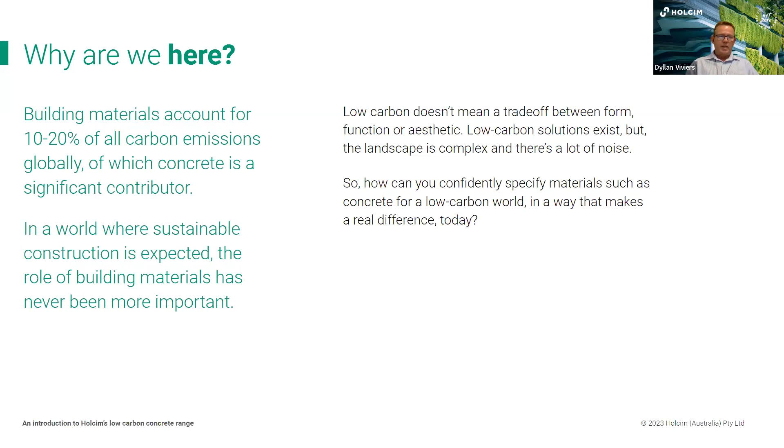It's all of us that have a role to play in that, right the way through the supply chain, from supplier to specifier to government, to the developer, the builder, the concrete placer. It's about having those conversations early in the piece, talking through the whole process and working with each part of the supply chain to ensure everyone's comfortable and aware of what to expect. It's about us all coming together and having those early conversations.

From Holcim's perspective, we launched EcoPact back in April 2021, a low carbon concrete achieving 30 to 60% reduction based on the reference case and verified by an EPD. It's been two years now since we launched EcoPact, and there's been a lot of work to work through and help with that education process.

Last year alone, I did 140, 150 odd presentations to all different stakeholders, from architects, engineers, sustainability consultants, developers, to actually being on site with the concreter while he's placing it. That's a key part of the whole journey, making sure we as suppliers are standing up and helping everyone through the supply chain understand that there are low carbon solutions out there.

You can start using them. And it doesn't mean a trade-off in performance or aesthetics.

The other mix that we launched, part of the EcoPact range, was EcoPact Zero, our carbon neutral concrete. Those two mixes are identical from a mix design perspective. Holcim has Climate Active certification, so what we do is really drive sustainability by reducing embodied carbon as much as we can, and then we offset the remaining embodied carbon.

Is offsetting going to be the way of the future? Definitely not, but it's a step in the right direction, and we just got to keep putting one step in front of the other.

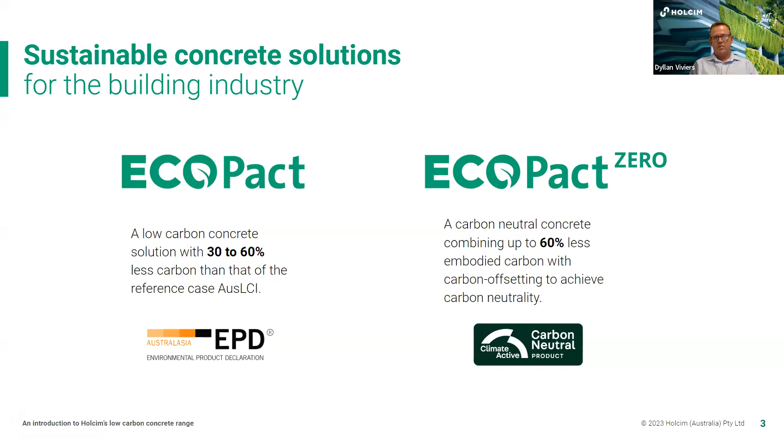Some of the key myths when it comes to concrete, we've been faced so many times having conversations with concreters on site who say, I used green concrete 10 years ago and I was here till midnight trying to finish it. But innovation and technology in the concrete game has come so far in the last 10 years. It's quite incredible.

All these points here: Holcim's EcoPact doesn't deliver longer curing time. We can do PT floors reaching 22 MPa in 3 days, pumpability to towers, self-compacting concrete, low carbon self-compacting concrete. EcoPact ticks every single one of these boxes, and those solutions are out there, but it's all about the education process, and we all should be taking a stand on that.

We should all be talking to suppliers, having those early conversations, talking to the actual contractor on site placing it, so that they're aware of it.

Last year, we did a bit of a roadshow with Surfers for Climate. What they do is pull together tradies who go surfing, spend the day surfing, and we did an actual roadshow with them talking about the sustainable concrete solutions that are out there now. It's quite amazing talking to the concreters as well as the specifiers, everyone has a different opinion.

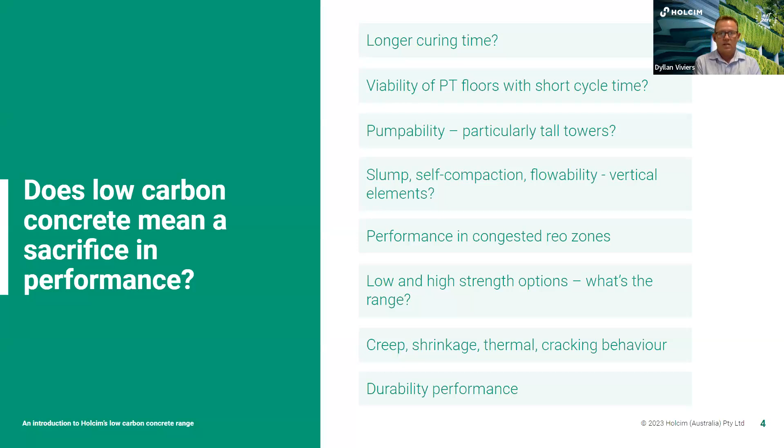We had technical representation on site, operational representation on site. The concreter was off that slab in the same amount of time as conventional concrete. Then on the structural side, the vertical columns, there's 40, 50, 65 and 80 MPa concrete in this project, all achieving a minimum 30% reduction with no problem and not affecting the timeline.

Same with the PT slabs, 22 MPa at 3 days. So there are solutions out there now, but you'll hear it time and time again from all of us: early engagement and early collaboration is definitely key to understanding what is available and how it can work. Then also doing trials and tests, so that we as a supplier can show contractors or concreters on site that it's okay, you can use low carbon concrete, you're not going to be there till midnight. It can be placed, pumped and finished like conventional concrete.

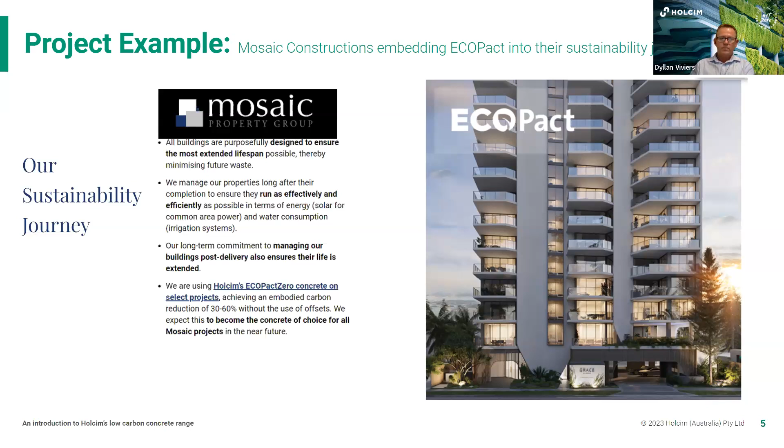It's all well and good to say low carbon concrete, this 25 MPa concrete, is reduced to 150 kilos of CO2 emissions per metre, but what does it actually equate to? Simply put, just one typical residential slab supplied with low carbon concrete achieving up to a 60% reduction equates to 8 cars off the road. We're also having those conversations with volume builders who do 2,000 houses a year. Can you imagine the difference they would make by converting over to low carbon concrete and the impact that could have on our environment?

That's been one of the challenges. The whole industry has gone through so many price uplifts and shortages on materials. Two years ago when we launched, that was a very difficult conversation with developers. Now developers and builders are starting to understand where we need to go. We've got to get to net zero ultimately by 2050. We need to start acting now. The conversations are a lot easier to have because there is interest and people are starting to understand more and more that low carbon materials can make a huge difference.

Some of the roadblocks are obviously price, and I saw that earlier on. You can get low carbon concrete for $5 on top of conventional concrete. It's out there now, you can use it and start factoring it in, but those conversations have to be had during the design phase.

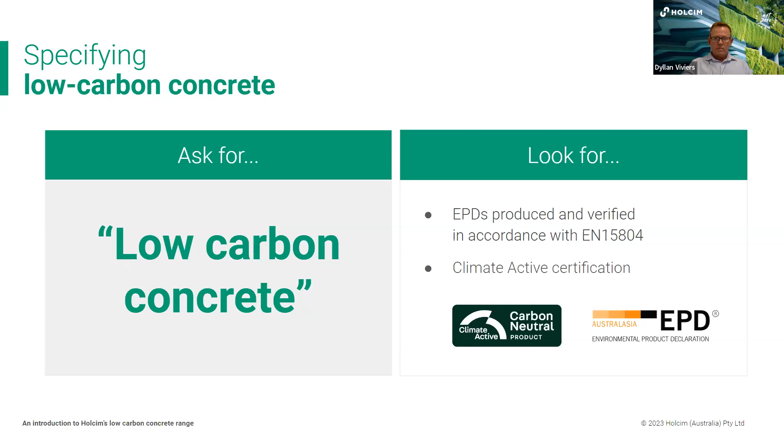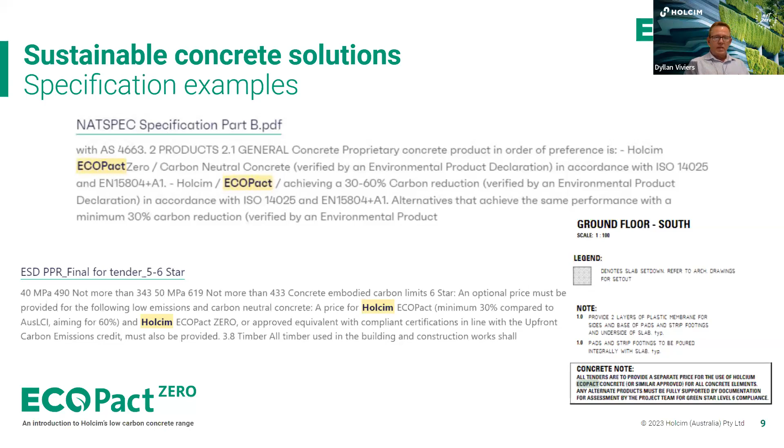Thank you, Dylan, that was terrific. Hearing the potential savings and the fact that you've got placing it, pumping it, and finishing it like conventional concrete is very, very encouraging. Look forward to unpacking a bit of that, drawing out some more in the panel discussion.

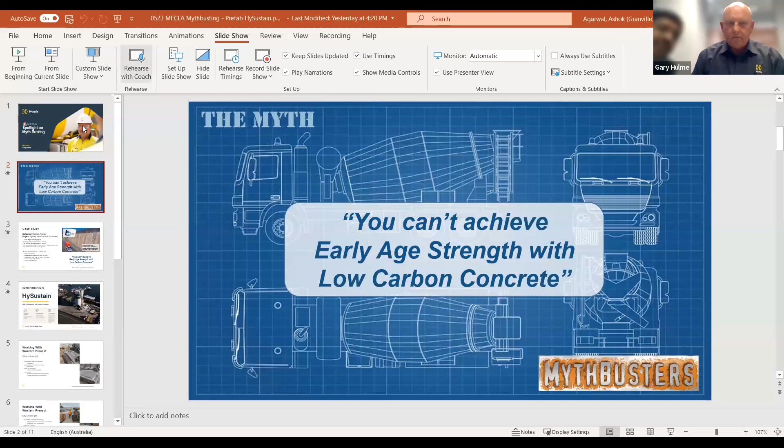Good on you. As I mentioned, Hymix have been a major supplier of ready-mix concrete since 1957. The myth we will be busting today: you can't achieve early age strength with low carbon concrete. Why is this a widely held myth? Simple: to reduce carbon, you have to remove cement, one of the largest contributors to carbon in the industry. But surely that means there'll be a reduction in early age strength and an increase in shrinkage properties. Or does it? For the purpose of this presentation, we used a case study with Western Precast, a valued customer.

We selected this application over post-tension or jump form because precast is particularly sensitive to cement fluctuations. This project is the Sydney Metro Southwestern line, which extends for some 30 kilometres, and it goes basically from Chatswood to Bankstown.

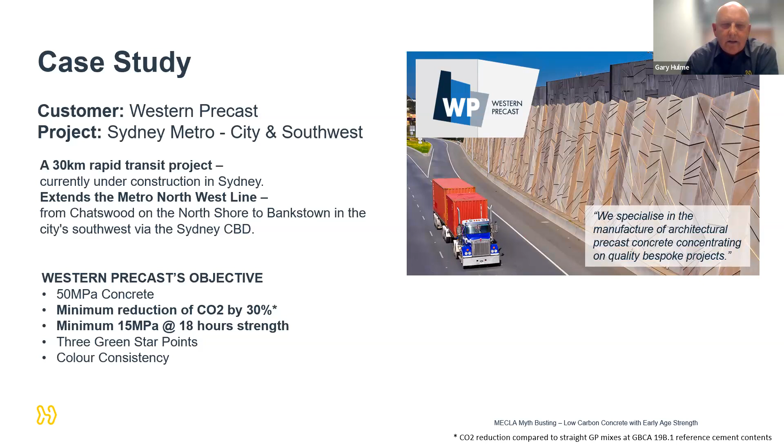The objectives of the customer's request was a 50 MPa concrete with a minimum reduction of CO2 by 30%, a minimum lifting strength of 15 MPa at 18 hours, 3 green star points, and colour consistency. You can't achieve early age strength with low carbon concrete.

Introducing HySustain. This is our high performance, low carbon concrete. Research and development began in 2019 by our technical team, and a few hundred laboratory trials and many field trials later, going live some 12 months ago, brings us to this presentation.

Low carbon concrete, up to 50% CO2 reduction compared to standard concrete. The early age strength is the equivalent of existing GP mixes. And the shrinkage properties are as low as 250 to 450 microstrains.

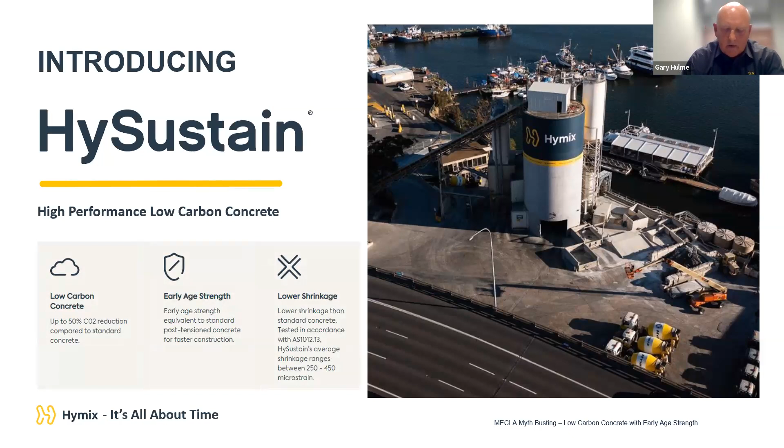Working with Western Precast. What did we do? Firstly, we introduced Western Precast to the concept that this new technology would in fact meet, even exceed what was being asked of them. Working closely together, carrying out plant trials, we were able to prove how HySustain worked and what could be achieved. We needed to get the mix approved by both the main contractor and the engineers.

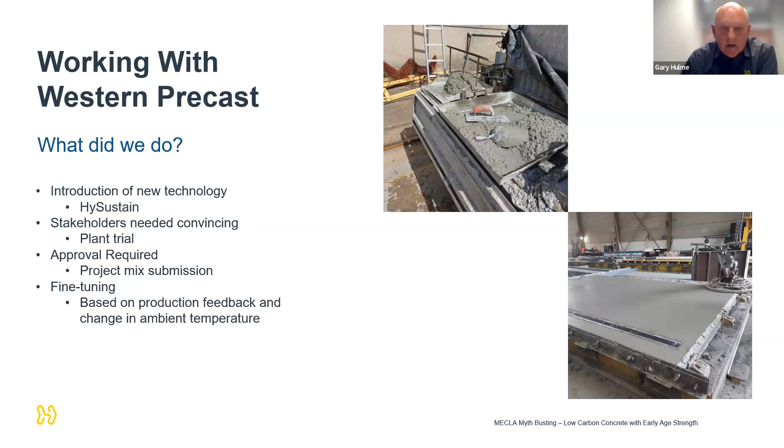Key challenges. As HySustain is a new technology, working with Western Precast to help their team understand placement and setting times, which, as it happens, is exactly the same as with standard concrete.

When Western Precast were convinced the claims were valid, we had to demonstrate to the engineers, John Holland Group and the Robert Bird Group, that this product, the HySustain performance, would satisfy their requirements and designs.

More cooperation between Hymix and Western Precast brought the trust that a 180 slump mix would in fact finish at the same time as the 100 slump mix that they were used to using.

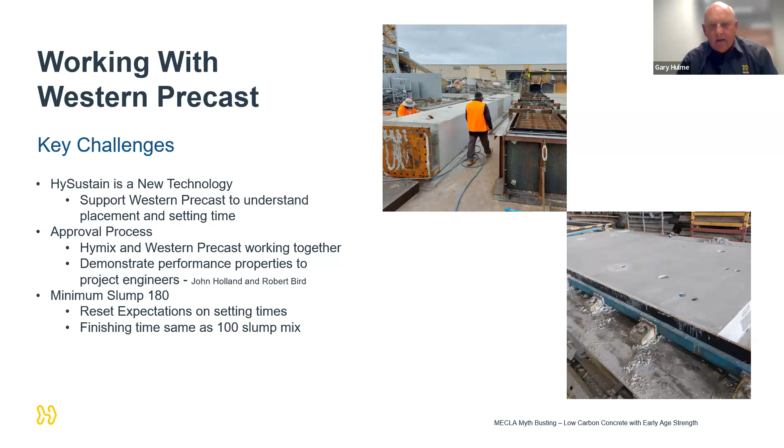What was the result? We had a target of 30% CO2 reduction. That was exceeded by 20%, to a 50% reduction. Western Precast achieved the 3 green star requirements. And crucially, we kept the project moving by meeting the production program due to the early age strength results.

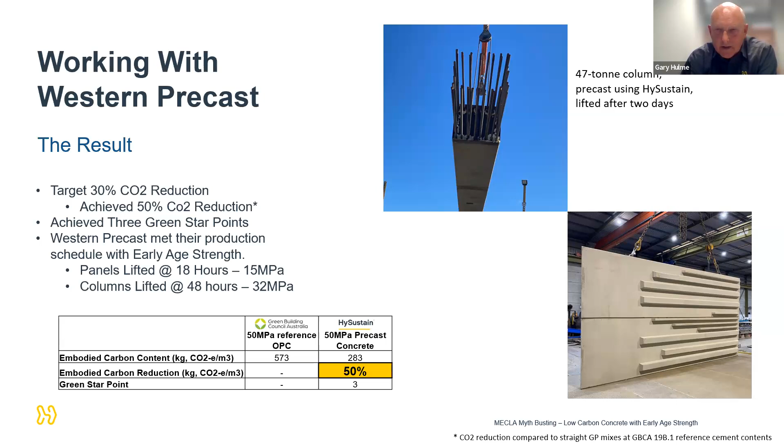The panel on the right-hand side lifted in 18 hours at 15 MPa, and the massive 47-ton columns that we produced lifted in 2 days. The requirement was 32 MPa, and we hit 39 MPa.

The key learnings from this partnership was communication between ourselves, the customer, and the industry specialists, reaching the balance between CO2 reduction and performance targets. By working together, we could reach a better outcome than the supplied specification.

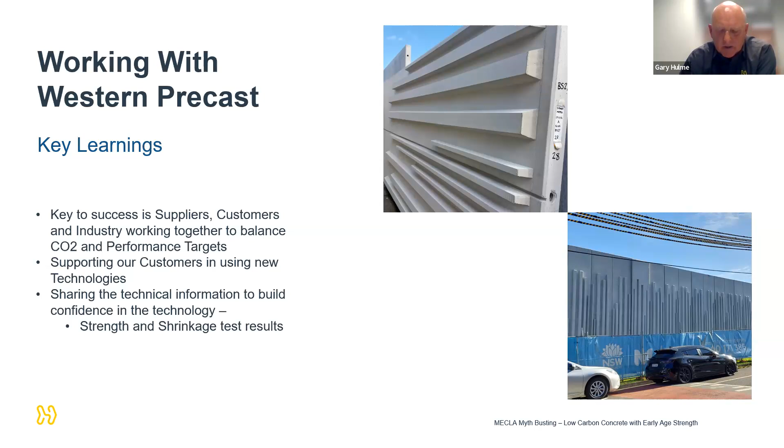When we introduce this new technology, we need to work and support our customers' journey. We share the technical information to allow them to become comfortable and confident with the new product.

The myth: you can't achieve high early age strength with low carbon concrete. We've busted that myth. You can achieve early age strength with low carbon concrete by using HySustain.

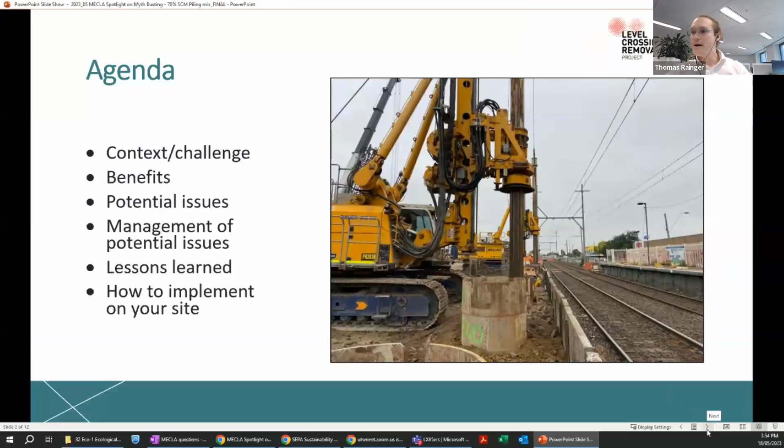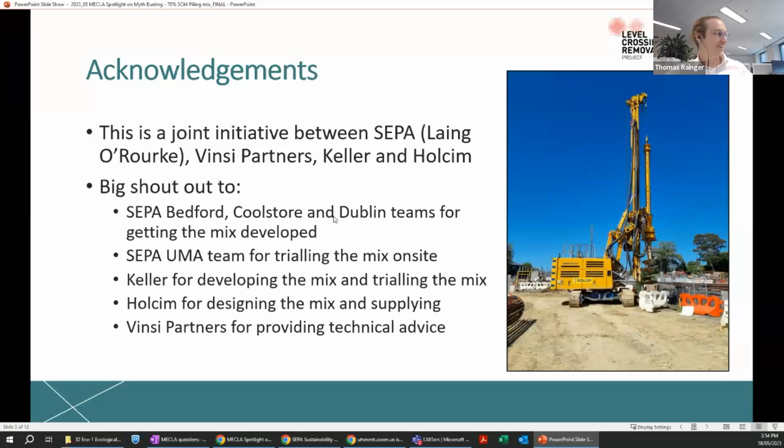For us as a project, our challenge was that the majority of our carbon emissions comes from concrete, and for our upcoming projects, about 50% of all the concrete is piling. I'm pretty sure we've covered some of the drawbacks, that it can take longer to cure and that sort of stuff.

So we looked at that as an opportunity and thought about what we'd achieved previously, which was 36% SCM, a reduction from baseline. Also what was achieved previously was a 65% mix on Melbourne Metro, which was a slag-only mix, but that registration had lapsed.

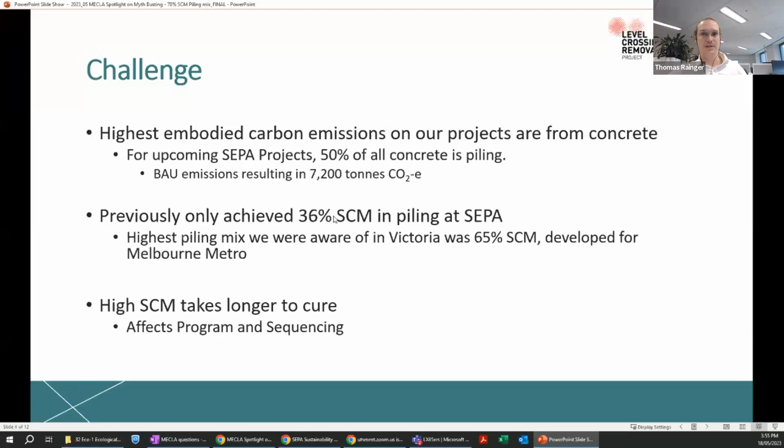So the reasons and benefits - we listed 3 different scenarios up in the right corner there. You've got the business as usual assumption for LXRP, which is current 15% SCM, what we'd previously achieved, and then now a low carbon mix. It's about half from the business as usual assumptions, and then almost half again of what we'd previously been able to achieve. There are also some additional benefits that come through increasing the content of SCM.

That's fully detailed from Vinsi Partners in our tender advice notice for one of our projects, and we're happy to discuss with them and share some knowledge. There's also durability increases, which is also more important for our projects considering we have a 100-year design life.

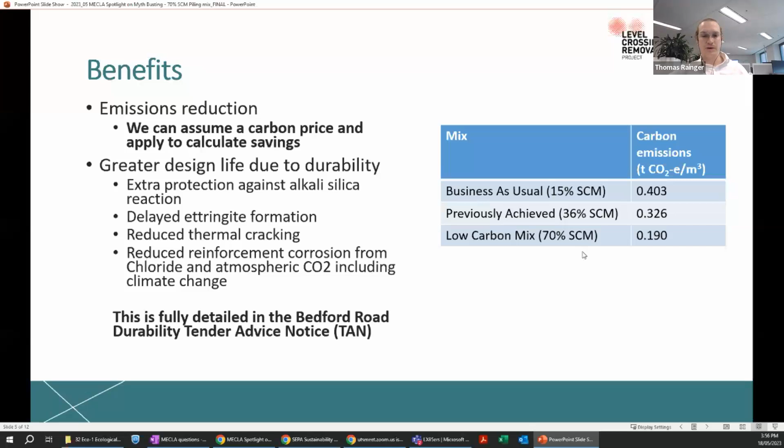So the first myth or issue we wanted to talk about was that previously we achieved a 36% SCM mix, mainly due to the misconception that we couldn't use anything higher than 40%, because that was what was in the Department of Transport standards. So we did some liaison and worked with them and also with MTM to determine what was accepted. Once they said yes, we can accept them, we organised with Keller and Holcim to get this piling mix approved.

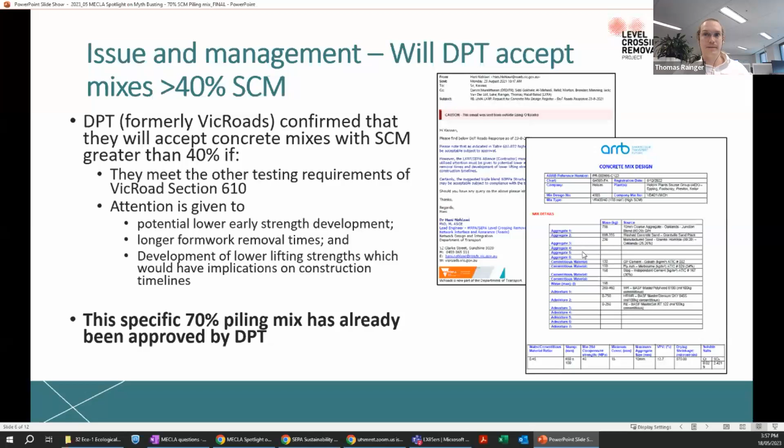So it's already been approved. If you'd like to use one in Victoria, all you really have to do is order it, or if there are other suppliers, they can go through the approval process, and should be fine if it meets all the other testing requirements. DOT just gave us the provisions that we needed to allow for all the strengths and development and that sort of stuff.

The second issue that we had was surrounding supply and where it was going to come from. Out in the east, we typically had some challenges previously, as some of the plants only had fly ash available, so we needed to work with our suppliers to get them up. So we did a bit of engagement with everybody and said, what can you supply to us from what plants? Can they do the 24-hour works? Do they have recycled water, all that sort of stuff?

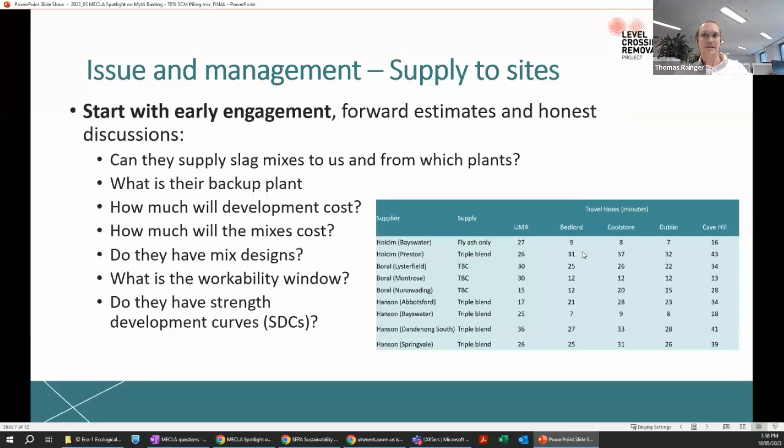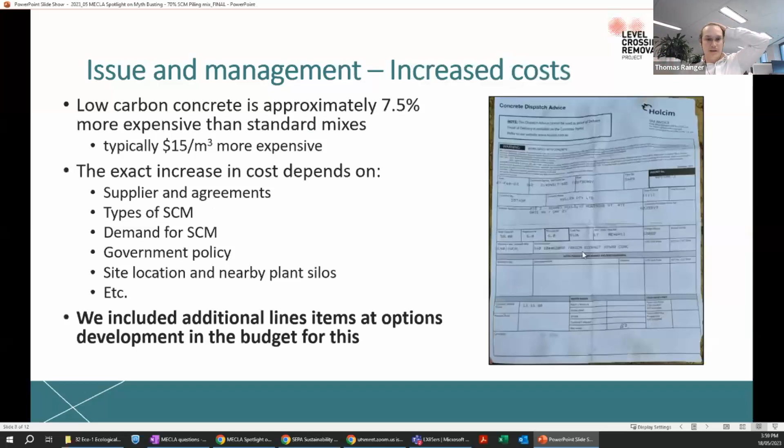One of the things we understood was that it was probably going to cost more. So we did a bit of market sounding — it's around 7.5%, $15 a cubic meter more expensive. So we just budgeted for it. That became one of our winning themes for the project. On an infrastructure project at the scale of 500 million, we can see how towards the end of a project they look to reduce budgets, and that sort of comes out of it. But this was a commitment we made, and we allowed additional costs for it. Not to say we won't reconsider, but it's something we identified, budgeted for, and allowed for.

The second thing is around when we can pile adjacent to them. Being 70% SCM, there's only 30% cement, so we achieve the 15 MPa we need within 2 or 3 days, which means we need to sequence our piles. We might create longer piling pads — drill one, pour it, skip one or even skip two. I was talking with the engineers the other day, and they said we might have to skip two and come back. What we're forecasting at the moment is being able to use it on 90% of the piles at some projects, but 100% on others, depending on whether we're doing a rail trench solution or a rail over solution.

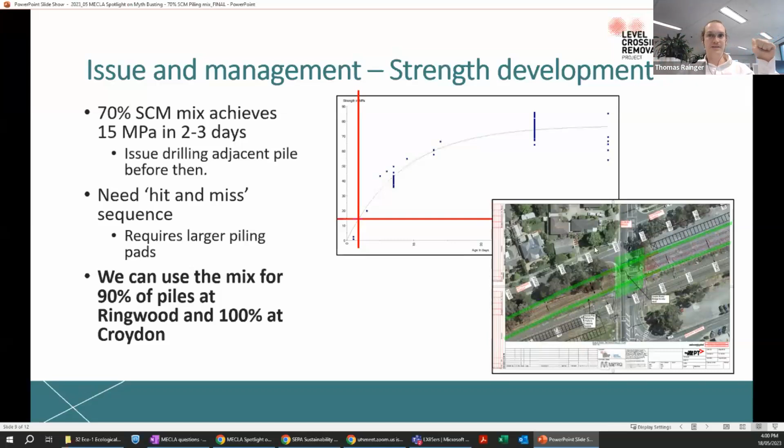We're working with our engineers to try to still get it used under these requirements. The next thing was identified early as well — when I mentioned previously, we developed a durability tender advice notice. We noted that two of the issues could be excessive bleed water and workability issues. Under that tender advice notice, we said the solutions were aggregate gradation and chemical additives, but we'd only really know by doing some test piles.

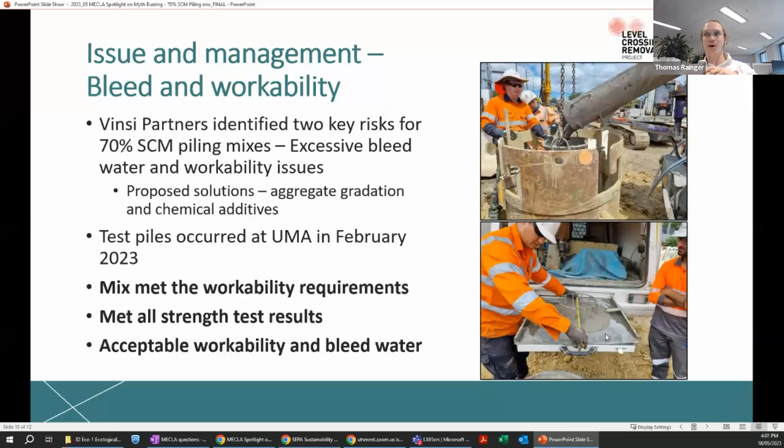So we did test piles in February, and they met the workability requirements — you can see that in the bottom picture, the J ring test. It was almost the perfect balance, because it still met the flow requirements but we didn't notice any segregation. Same thing when we did the break back — we didn't notice any bleed water. But that was just a trial of 2 piles. We'll still need to do more piles to get a larger data set.

So the insight is: just be honest, you've got to start and budget a little bit more for it. Or if you've already started your project, have an honest discussion about how much it's going to cost for your total amount of piling. Is it worth going down this path? If we can halve our carbon emissions, I'd say it's probably definitely worthwhile investigating.

Then talk about how you're going to sequence them. If it's something like an occupation in the rail sector, there might be some piles you just can't use it for — you might need some with really high early strength, and that's probably where you couldn't use this mix unless you go with new innovative additives. Then engage with your supplier and forecast early. Use a couple of piles as the first test piles, which you probably should do at any site anyway, just to make sure you've got the right methodology. And if you need to over pour them again, that should be okay.

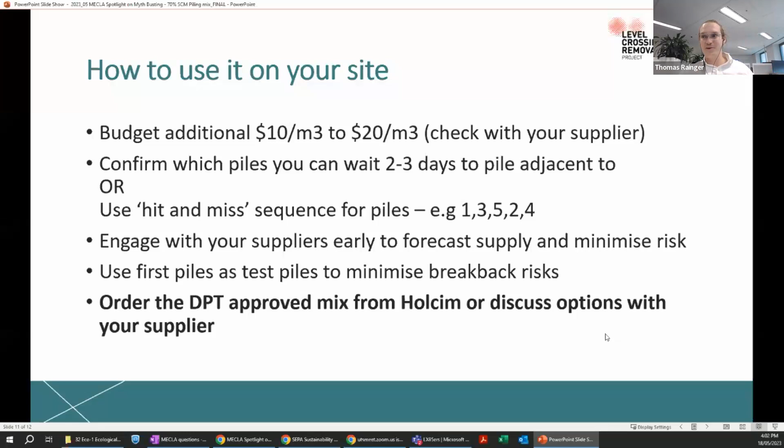Or you could just order the approved mix from Holcim, or discuss with your supplier about getting a mix approved.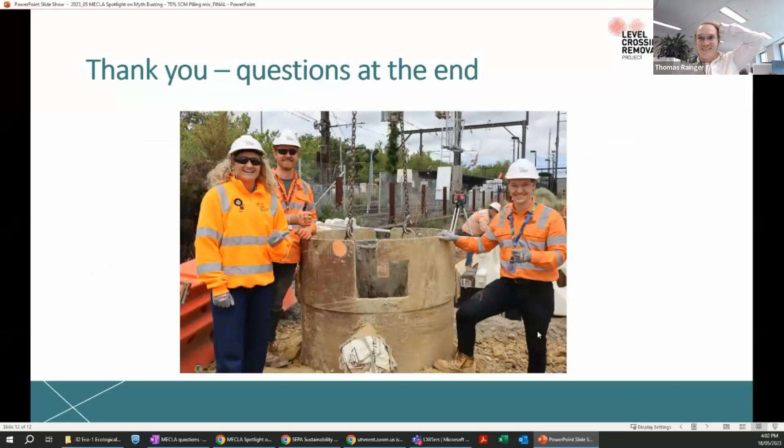This is a photo from our trial. As you can see, we're all super stoked to have used it. So thanks, everybody — my teammate Claire's not really a fan of the photo, so she probably hates me.

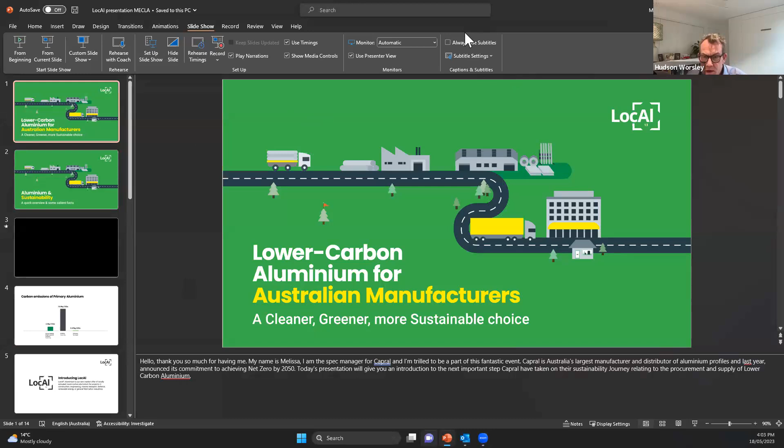As mentioned in the introduction, I'm the specification manager for Capral, and I'm thrilled to be part of this fantastic event. So glad to hear so many attendees today. For those of you that don't know, Capral is Australia's largest manufacturer and distributor of aluminium profiles, and last year announced its commitment to achieving net zero by 2050. Today's presentation will give you a quick introduction into the next important step Capral have taken on their sustainability journey relating to the procurement and supply of lower carbon aluminium.

These are very quick presentations, so I don't have much time. I'm going to jump straight into it. I'd like to start by playing a video outlining some key facts about aluminium production, sustainability, and an overview of the LocAl offering.

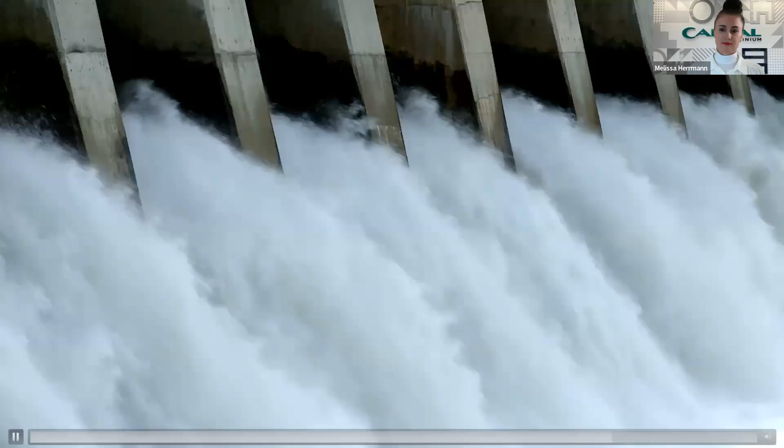Okay, so I hope everyone found that informative and that the video didn't lag too much. So of course, we're all here today because we are aware of embodied carbon in materials, and aluminium is one of the most carbon intensive materials used by the construction and manufacturing sectors.

To recap where the carbon emissions come from in the aluminium production process: bauxite mining, alumina refining and transport of raw materials to the smelter represents approximately 2.6 kilograms of embodied carbon per kilogram of aluminium. We have calculated the carbon emissions of our aluminium extrusion process to be approximately 0.47 kilos of embodied carbon per kilogram of aluminium extruded.

But the main contribution to the carbon emissions of aluminium comes from the electrolysis process used in the smelting process. Around 60% of the sector's greenhouse gas emissions are from the production of electricity consumed during smelting. So you can see that there in the middle bar.

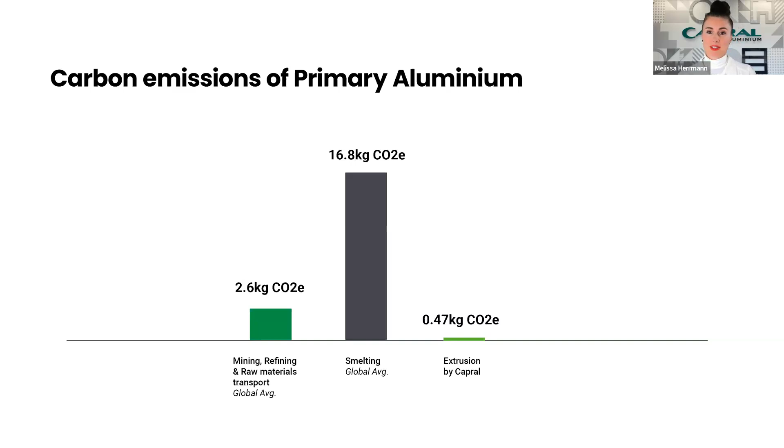It's estimated that the current global average carbon emission for primary aluminium is 16.8 kilograms of CO2 emissions per kilogram of aluminium. And within Australia, the 4 aluminium smelters consume approximately 10% of the national energy grid.

The good news is that we have a lower carbon solution ready to supply now. Using alternative technologies, aluminium can be produced with a significantly lower carbon footprint. In fact, aluminium with a CO2 emission of 4 kilograms per kilogram of aluminium is available and recognised as some of the lowest carbon aluminium on the market.

Enter LocAl, Capral's newly released lower carbon aluminium offer for Australian manufacturers. It's locally extruded by Capral with aluminium sourced from ASI certified smelters. We are the first extruder in Australia to promote this and have made it available to the various markets we service that use aluminium extrusions.

When you choose LocAl, you are making a cleaner, greener choice for your project, at least halving the embodied carbon of the aluminium. Primary billet certified CO2 emission content at or below 8 kilograms for LocAl green, and only 4 kilograms for the LocAl super green.

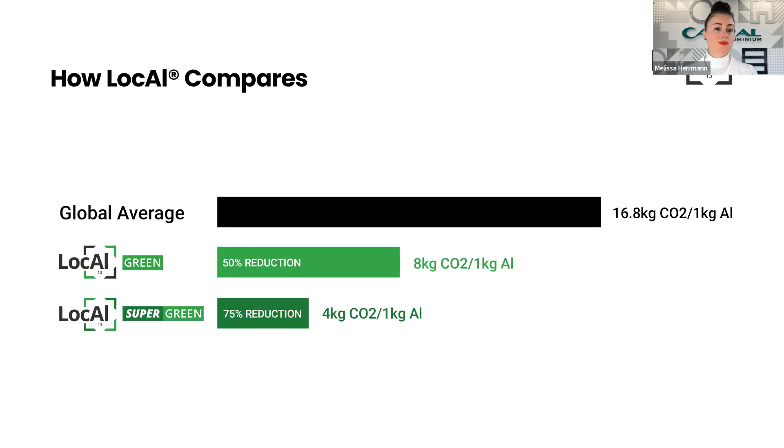Now, how do we know where the aluminium comes from, and how can you be sure that our claims can be verified? To provide transparency to our customers around how we supply LocAl and to give a benchmark for constantly improving our sustainability practices, Capral has become a member of ASI.

ASI is the Aluminium Stewardship Initiative, a global non-profit organisation that brings together producers, users and stakeholders in the aluminium value chain. ASI has developed an independent third-party certification program to ensure its sustainability and human rights principles are increasingly embedded in aluminium production, use and recycling.

ASI's performance standard and chain of custody standard are designed to link responsible production with responsible sourcing and thus support increased emphasis on sustainability in procurement practices. As members of ASI, Capral is required to undergo regular audits and a certification process, which provides our customers assurance that we are providing LocAl and that our supply methods and certification process is transparent and relied upon.

Capral were assessed for ASI certification to performance and chain of custody standards version 3 in March. The smelters that we source billets from are also ASI certified. Chain of custody allows for tracking at each stage of the aluminium process. Capral has implemented a material accounting system to track ASI chain of custody material within the company, ensuring responsible sourcing and adherence to environmental, social, and governance practices.

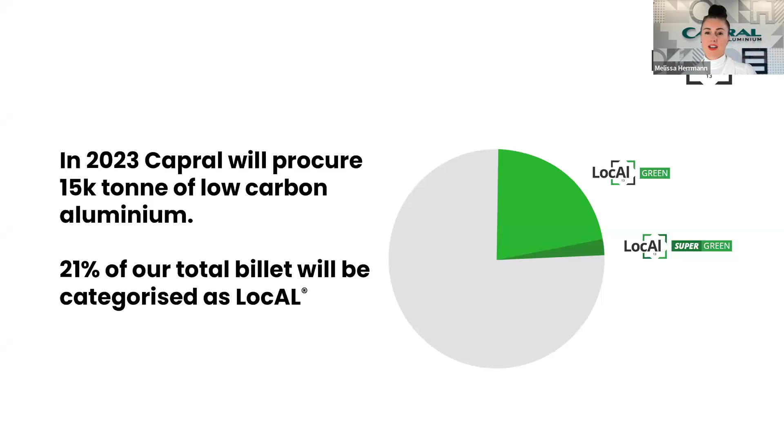So we have EPDs currently available ex-smelter for LocAl green and super green, and Capral will have their own EPDs for release to market at the end of the third quarter of this year.

Now, there is a small price premium that will be charged for the supply of these two products. But the good news is that Capral have chosen to absorb the extra cost and not pass it on to any of our proprietary window and door systems.

So I'll repeat that. Lower carbon aluminium can be specified now through Capral for no additional cost for our locally extruded systems. So other sections like security, geometrics, industrial angles and the like can be ordered in LocAl green or super green and will attract the premium. LocAl super green orders will also attract the premium.

Ultimately, we don't want costs to be a deterrent or a barrier to our customers using LocAl while the industry moves towards decarbonisation. And I would argue that the more we specify lower embodied carbon products, the swifter the industry will move to overcome energy challenges because strong consumer demand can't be ignored. So thank you so much, and I look forward to answering any questions later in the session.

Thanks, Melissa. That was terrific. Very, very interested to hear about the LocAl products not attracting the premium. There's a myth busted right there. That's great. Thank you. Exciting. Look forward to hearing your comments in the panel discussion. And I'd ask you, like all the other speakers, keep an eye on the questions because we've got such an engaged audience. They will be asking them. All right, Matt Di Marco, mate, I can't see you, if only you were wearing something bright. Oh, way too bright. All right, over to you.

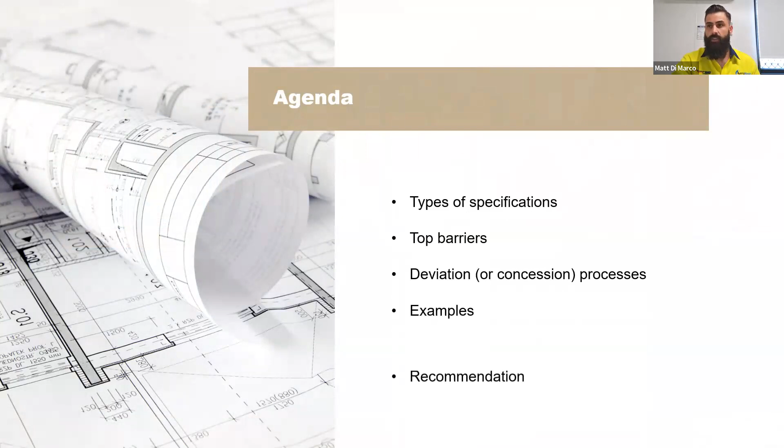All right, so today's agenda. We're going to be going through the types of specifications out there, the top barriers to deviating from specifications, the deviation, or more formally known, the concession process, what that looks like. We'll go through some examples and my recommendations at the end.

Okay, types of specs. We have descriptive specs, and these describe the requirements for materials, craftsmanship, and installation that must be followed. We have prescriptive specifications, and these prescribe the particular material and method that you need to achieve results. We have reference specs, and these reference certain documents, just like Australian standards. And of course, the one we always aim for, performance-based specs. These specify the desired outcome and the criteria by which the outcome will be evaluated upon. So all these types of specs offer differing levels of flexibility in terms of the types of materials that you can use on site on a construction project, in your design and in your build.

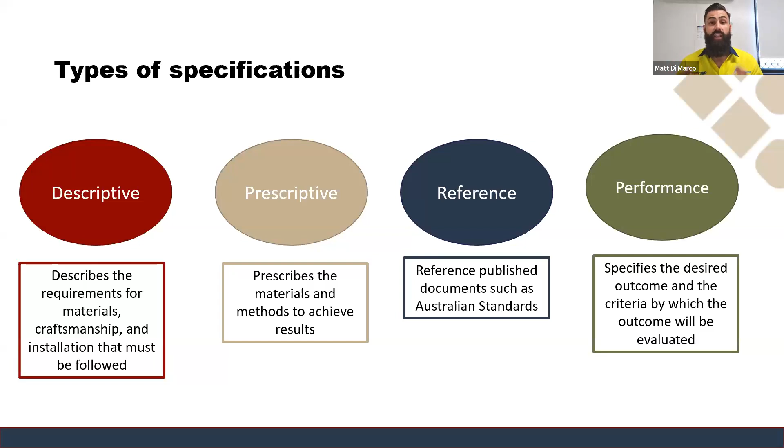Key question, can we deviate from specifications? Yes, we bloody can, and we have in the past, and we will in the future. But there are a few challenges to this, and we'll go through some of those barriers.

So in my experience, these are my top barriers from deviating from specifications. The type of spec. As we went through previously, the type of spec is important because that dictates what you can and can't do. We try and aim for a performance-based spec, but it's not always the case. So that's a key barrier. Time. Time is key, time is money, and program is one of the most important things a project director wants to stick to. Because if you go over program, you blow out costs. So you don't want to be holding things up.

So, missed opportunities - you want to get this done early. There is a window of opportunity to get this successfully over the line, and that's at the planning phase, tender phase, or at very early design. You can do this at the construction phase, but you've got to consider all the other barriers along with this, and make sure it's a quick deviation, otherwise you'll hold up the program.

People can be amazing, but people can also be a pain in the ass, let's face it. People - ourselves - are a barrier, and I'll speak about this at the end. And you don't know what you don't know.

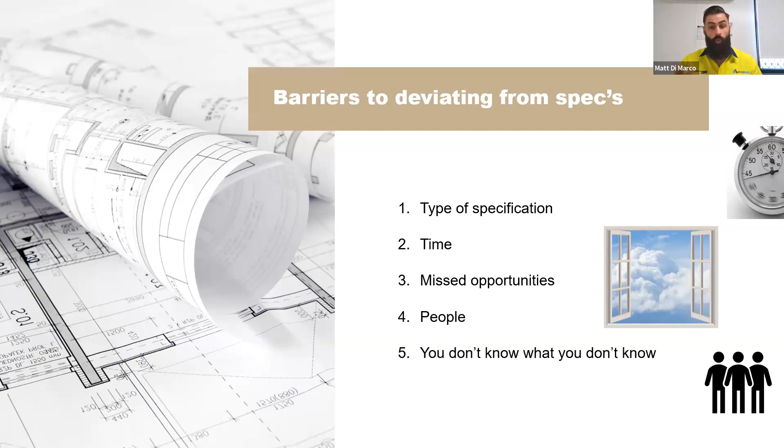Okay, so how can we deviate from specs? We'll go through some examples, but firstly I just want to show you what Transport for New South Wales have. In front of you here is Transport's concession process, and that looks scary, but it's there for a reason - it's there to assess and manage risk. I love that process - once you go through it, all you have to do is follow that process flow and address the boxes. Other agencies do have a concession process, but it's not as formal as this one.

Other agencies are, you could say, a lot more flexible than the Transport concession process. But I assure you, Transport are working on this, to make it as efficient as possible to get past that barrier of time.

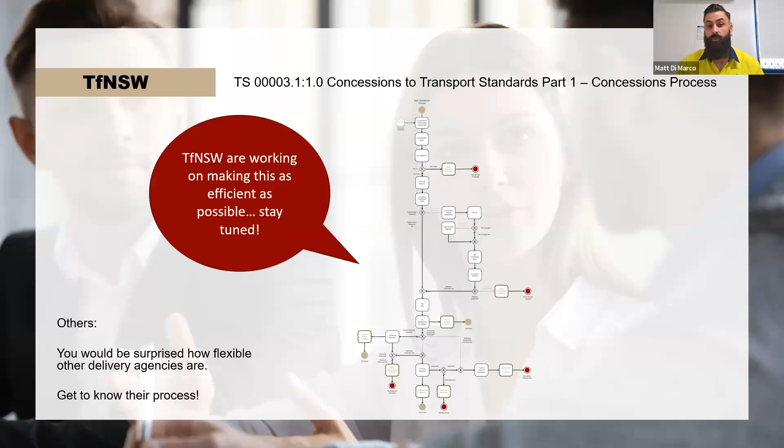Okay, some live examples we've done in the past. Asphalt - the specific specification here was R116 on a TFNSW project, particularly looking at a product called Tonerplas. We wanted to lay Tonerplas into our asphalt mix and put that on some access roads on a project called the New Intercity Fleet Maintenance Facility on the beautiful Central Coast. Where else would you rather be? How do we do that? We'll go through that next.

It was a gate process. This was considered a minor change, and it only took 3 months to get over the line.

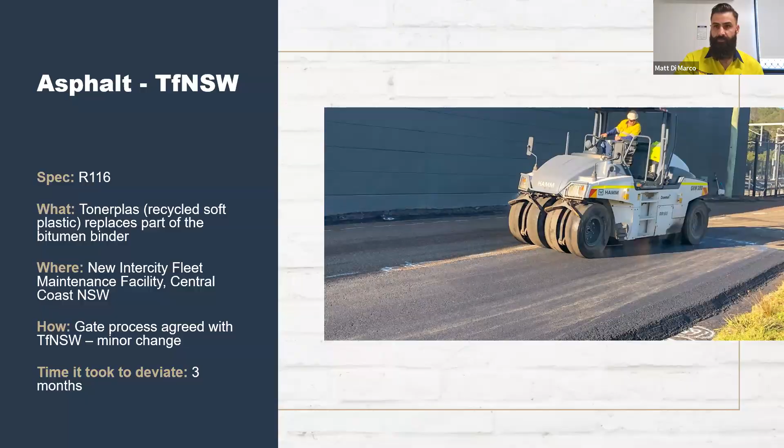So how did we do it? What was our game plan? First of all, we identified and informed our stakeholders and key decision makers. We then asked the golden question: what do you need to sign this off? We wrote that down, everyone committed to it, and we gained a tentative green light to proceed.

We confirmed our concession process with our client, and I suggest you do the same, to make sure everyone is on the same page of the steps to come. We confirmed cost - very important - to make sure it's within budget or allowance of budget. We confirmed warranty with the manufacturer, to make sure no one's coming after you if things do go wrong. There's a low risk of things going wrong in the future.

Liability - most projects come with a 2-year maintenance period, so you want to agree with the client on those liability terms.

We then developed a business case. In this case, we obtained an approval to use from the asset owner, because Transport were not the asset owner, and generally whatever the asset owner wants, they get. We also obtained examples of past projects laying this product, to give Transport the confidence and lower the risk profile for them to sign this off. And once that was in place, we went through the concession process, and then there you go - it was approved. We laid a beautiful stretch of road along the New Intercity Fleet Maintenance Facility.

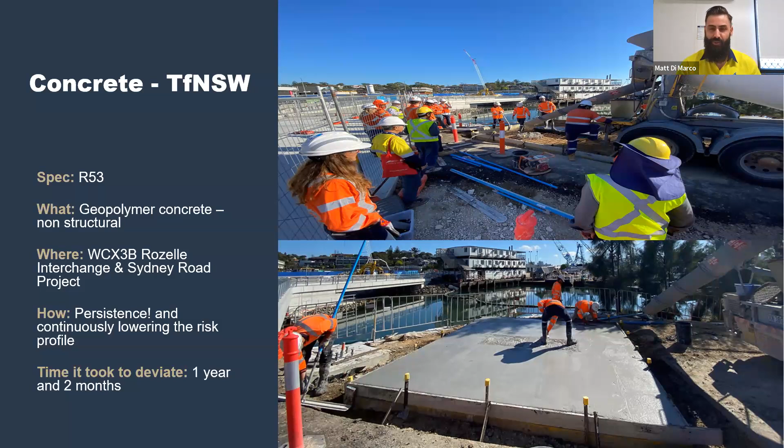It took a lot of persistence. Once again, we had to lower the risk profile and convince many, many stakeholders, and it took 1 year and 2 months to get approval to use.

So how did we do this one? Similar process - we identified and informed all our stakeholders and key decision makers. Because this was a high risk application in their eyes, we had to consult many, many people. Once again, we asked the golden question: what do you need to sign this off? And we gained a tentative green light to proceed.

We applied for some funding and did some R&D, because this is not a new product. There is some research out there, but we wanted to create new IP. We wanted to hand over all IP to our client to inform a specification change, because this is not just about geopolymer, this is about all low carbon concrete. We wanted to get all of Boral's products, all of Holcim's products, Hymix, Adbri, whatever they have. If you've got a low carbon mix, we wanted to get those into specs. So we thought we'd go the nth degree and trial a geopolymer and get approval for that to allow for those mixes to be used in the future.

Once again, we confirmed the concession process. And then we went on the sell, developed a business case, and this took a very long time. A reason why it took one year and two months was selling it to the project, the manufacturer, and the client. Everyone had their concerns, and we had to bust some myths.

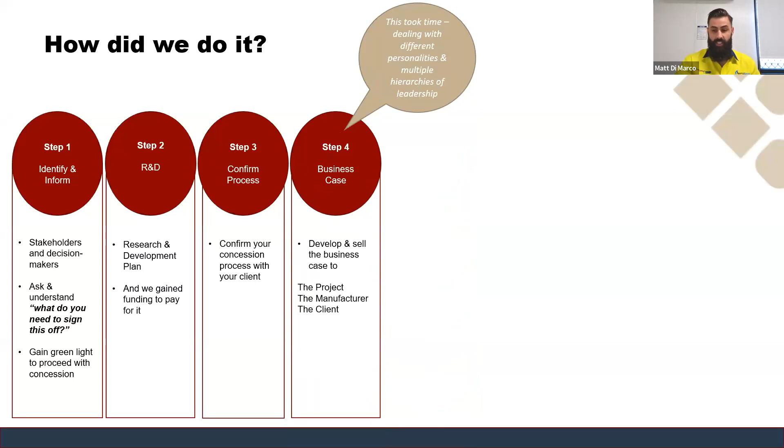Liability, we made sure that the client took liability for this. As the project and the contractor, we didn't want to take this on in the future. So we came to agreement with TFNSW that they took on this liability in the long run. We developed a project-specific spec to use geopolymer, and we used that to benchmark our performance upon.

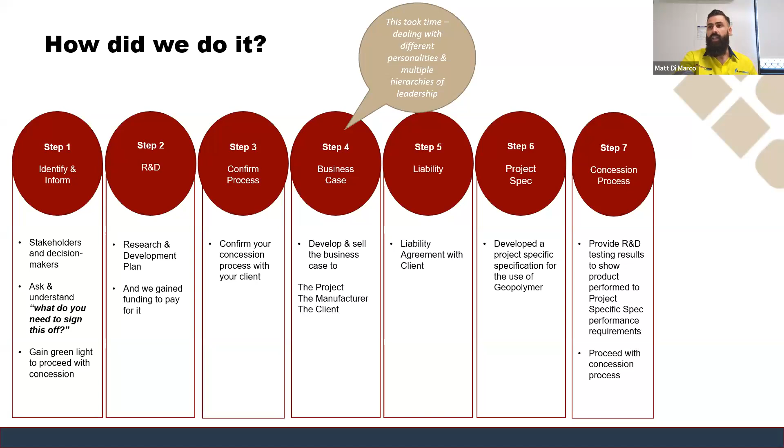Our R&D, it's still going. It's a 3-year program. We poured our first geopolymer mix in the first year, and we compared our results against that project-specific spec to make sure it performed the way it was supposed to. Once that was all good and given the green light, we proceeded formally with the concession process. And boom, boom, shake the room, we got it approved and we started pouring. So that was fantastic.

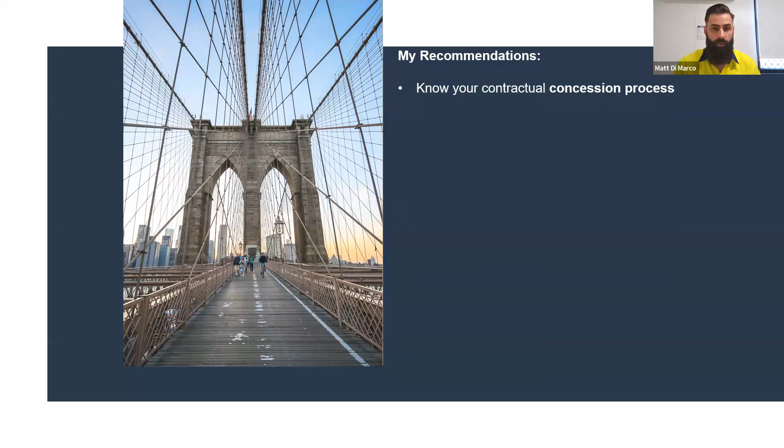Okay, so my recommendations, what have I learned? Know your contractual concession process. Once again, you don't know what you don't know. There are different processes out there. They are more flexible than others, more formal or informal than others. Please know that, because you have to communicate that to your project and also the other stakeholders you are dealing with.

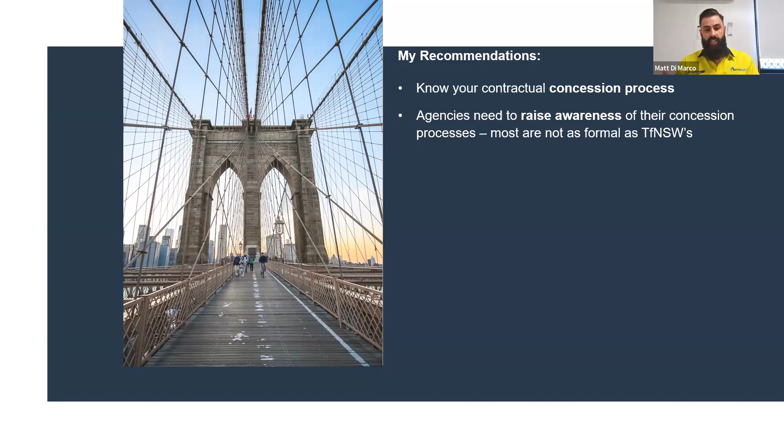Agencies need to raise awareness of their concession process. Relating to my first point, I think it's really important that delivery agencies make an effort to show people, if you do have a better way of doing things, here's the process to go through to get that approved.

Leadership is paramount. If you do not have the backing of your senior leadership team, good luck to you. It is really important that our project directors, senior leaders, whoever they may be, back you all the way along on the journey. It makes life a lot easier.

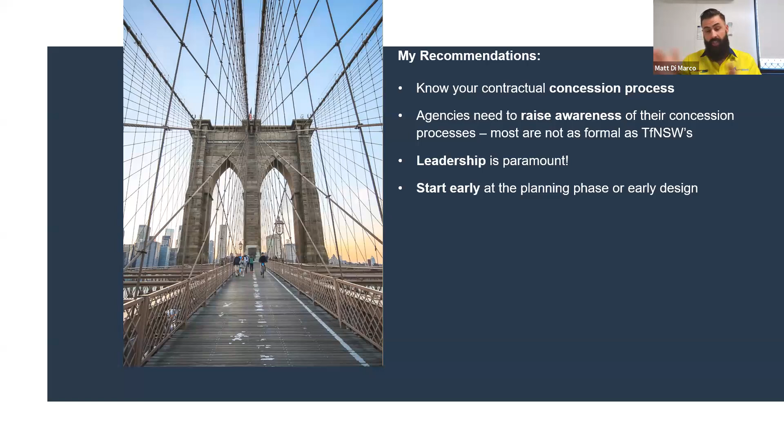Start early. Like I said, time is money. Program, you do not want to delay program. And depending on the type of deviation you want to pursue, they take longer or shorter amounts of time, depending on the risk that deviation may pose to your design and build.

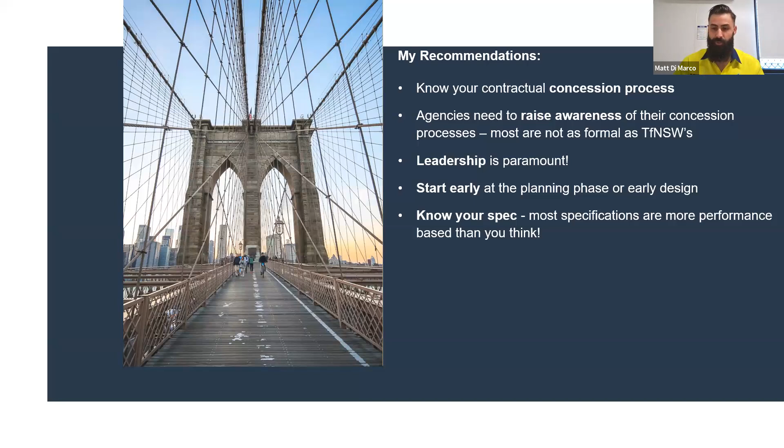Know your spec. You'd be surprised that most specs are more performance-based than you think. People have this perception that, oh no, B80, you can't do anything, R53, I can only do so much in terms of concrete. But if you actually read that specification and consulted with subject matter experts, you'd be surprised how much you can actually do without deviating, that is.

This might split the room. So do you even need to deviate? If you want to introduce an alternate product, is it worth it? Why not build clever? Look at the design, that's where the big savings are. Can you eliminate certain things? Stop over-engineering, half the thickness of that slab. There are some big savings there if you concentrate on the design.

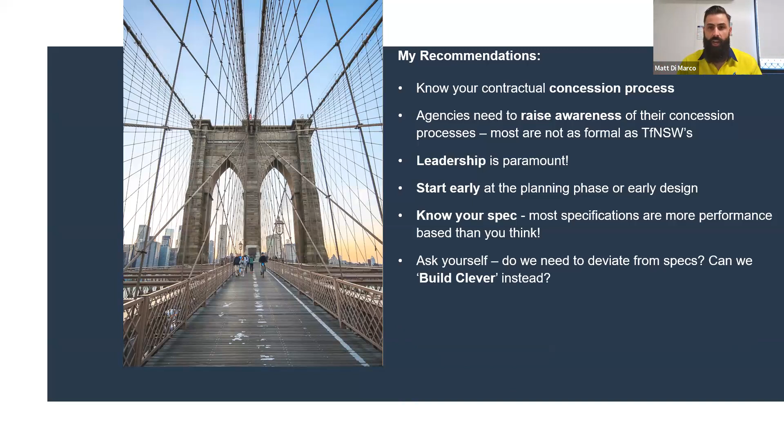And a confused mind will always say no. We found this particularly in our geopolymer journey. We had a lot of decision makers, and this is not just geopolymer, this is in general, that don't know the manufacturing process and don't know how the material is supposed to perform. This is not just on the client side, this is also on the contractor side. This is sustainability professionals, they want to do things, but they don't understand what the material is supposed to do. And that whole line of people, from on the ground to senior leadership to that client side, it's imperative that people know their product that you're making a decision upon. Because if they don't know it, they're just going to say no because they don't understand.

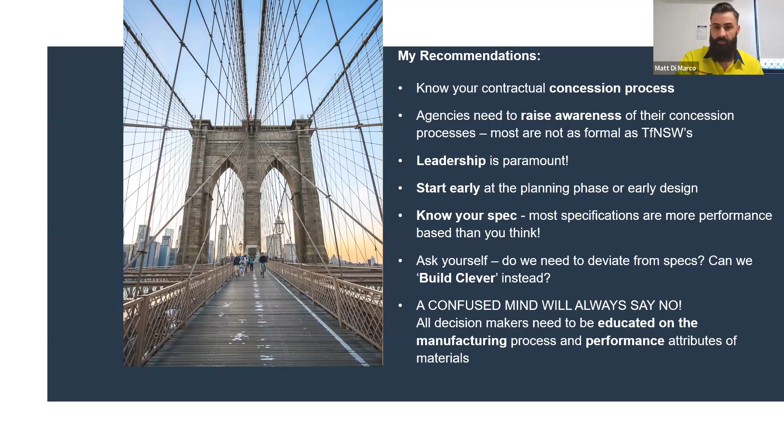So I hope I've challenged your thinking today, because if you've got a better way of doing things, voice it, because this is one tool in our toolkit that will propel ourselves into a sustainable future for you and your family. Thank you.

Matt, thank you. Your enthusiasm is palpable. Love it. And having practical case studies like that is always the way to get the message across. I love what you're saying about leadership. I think the L in MECLA is for leadership, so that resonates strongly with us, and I'm really keen to hear your thoughts in the conversation to come.

I actually live just up the road, joining you from just up the road from the Rozelle interchange. I'm going to go get my boots, hopefully not stuck in the setting geopolymer, but I'm going to go have a look at it. Good to know that's just down the end of my street.